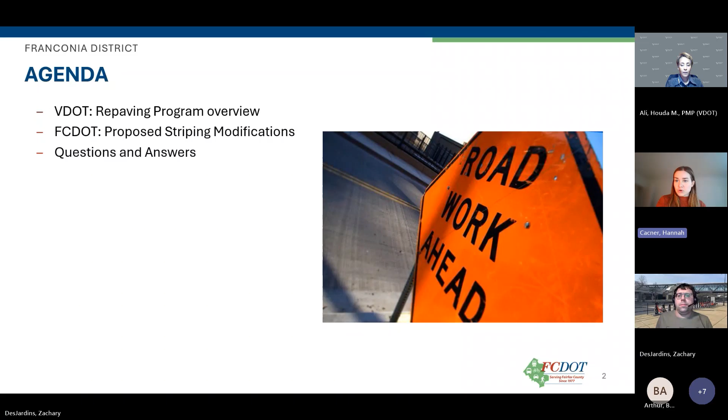Well, thank you, Hannah. Good evening, everyone. Pulling up the slides now. Do you see the slides? Yes. They're not in presenter mode. Oh, there we go. Okay, great. Thank you. Good evening, everyone.

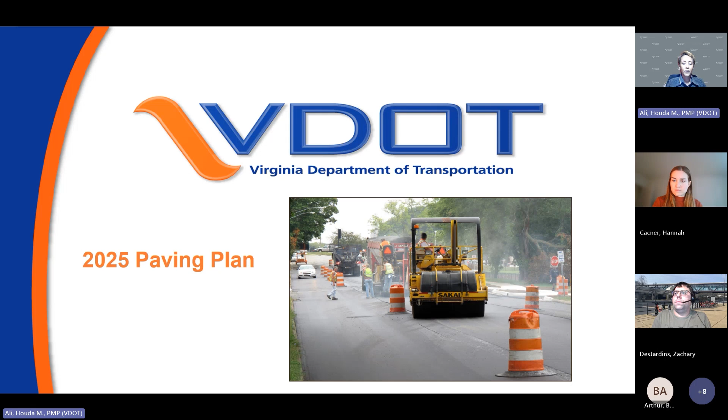I will be presenting the VDOT annual paving program tonight. On tonight's agenda, we will be covering the state lane mile inventory and the lane mile inventory for Northern Virginia District, the planning and construction phases of the repaving schedule. We'll also go over the process for how roads get selected for paving and how the pavement condition is determined using the CCI rating system. We will present information about our dashboard and the pavement condition targets, the various types of pavement treatments, this year's budget, and the different types of pavement markings and striping before we transition to the county's presentation on the topic.

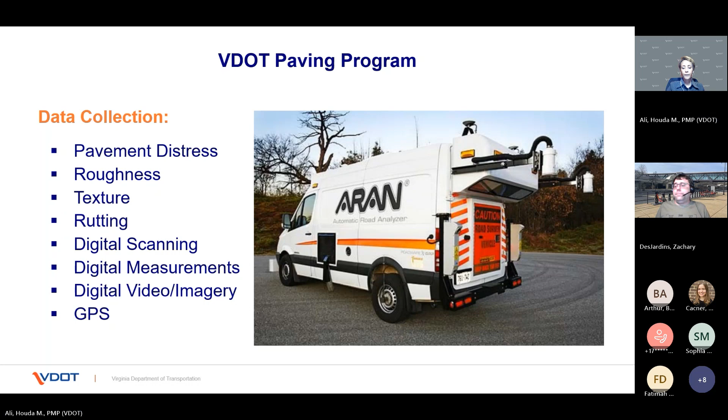The frequency of data collection depends on the type of roadway. Data is collected annually for interstate, primaries, and high-volume secondaries, those with average annual daily traffic higher than 3,500 vehicles per day. For low-volume secondary roads below 3,500 vehicles per day and with a route number of 600 or higher, those make the majority of the lane mileage, including residential streets. For those, we do 20% every year with the goal to complete the entire mileage inventory every 5 years.

Once the pavement condition data is collected and analyzed, it gets translated into a rating on a scale from 0 being worst to 100 being best, like in a new roadway. The rating system we use is called CCI, as mentioned earlier, which stands for Critical Condition Index. We focus on very poor and poor roads with sufficiency ratings below 60 CCI. We do not pave roads with ratings higher than 60 CCI.

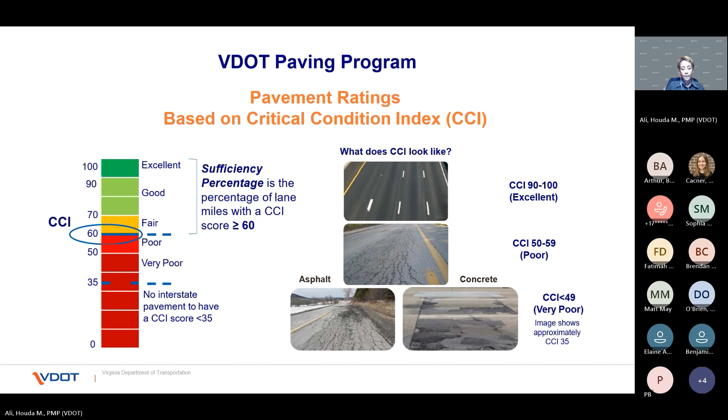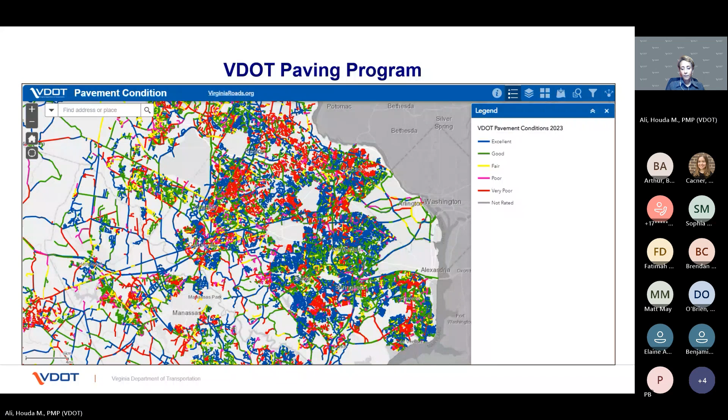In general, there are two main types of treatments: preventive maintenance treatment, where we try to extend the life of pavement by applying slurry seal. We also do limited patching and crack seal. Candidate roads are typically not in poor condition and have CCI rating of 60 or above.

In regard to the corrective maintenance, we do mill and overlay 2-inch most commonly and up to 4-inch, depending on the road condition. This treatment is most common and targets roads in poor condition. In rare occasions, we may have to replace the pavement to full depth and rebuild the road. Roads targeted with this type of treatment are typically very old and were built to old standards.

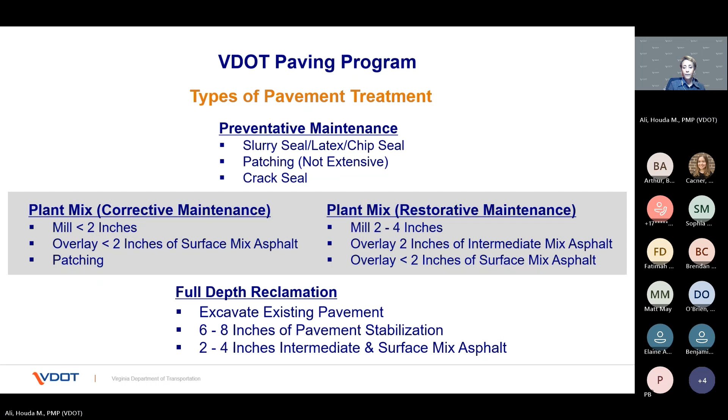Our VDOT infrastructure and maintenance teams have determined that about 43% of our low volume secondary roads have combined critical condition index in the 30s and 40s, indicating very poor condition, and are due for repaving. At current funding levels, we pave about 6% of the road network each year. Nova District continues to work diligently to catch up on paving roads across Northern Virginia, and until the roads are ultimately repaved, maintenance team will continue to monitor and treat roads for emergencies and safety-related issues such as potholes and needed patching.

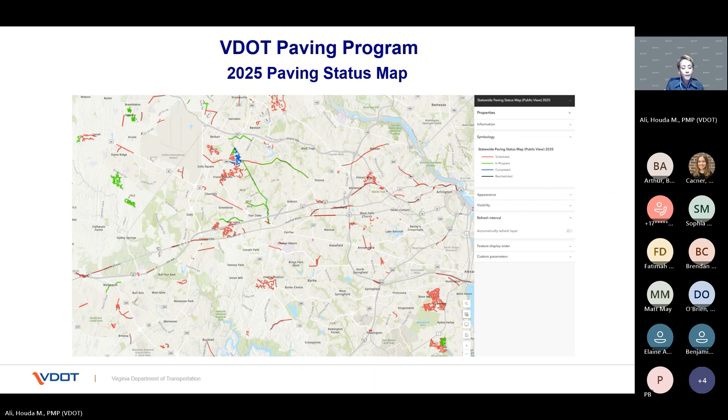VDOT restripes most commonly to replace in kind, as in put back what was existing before we mill and repave the road. We may occasionally restripe to improve a traffic condition by extending a turn lane, for example, or to enhance safety and operations. We also take the opportunity of repaving to collaborate with the county to implement new marking patterns if existing pavement width allows, to enhance on-road bike routes, and to add new crosswalks where feasible to improve pedestrian safety.

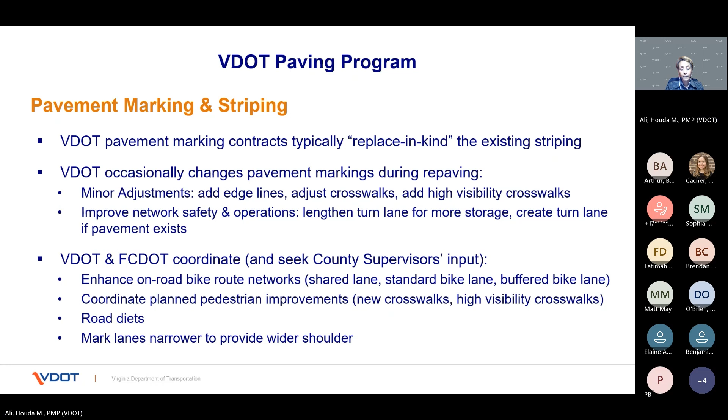This last slide contains some helpful information on how to report a road problem.

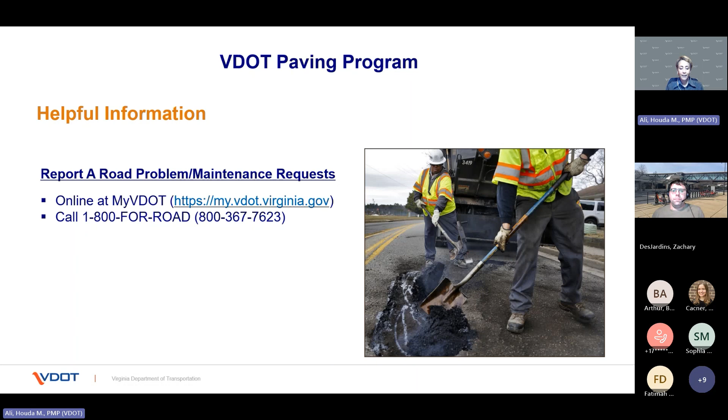Thanks, Houda. I saw that ARAN van not too long ago checking I-66, so it does exist. Oh, that's cool. I haven't seen one yet. Yeah. I was like, it looks exactly like you shared.

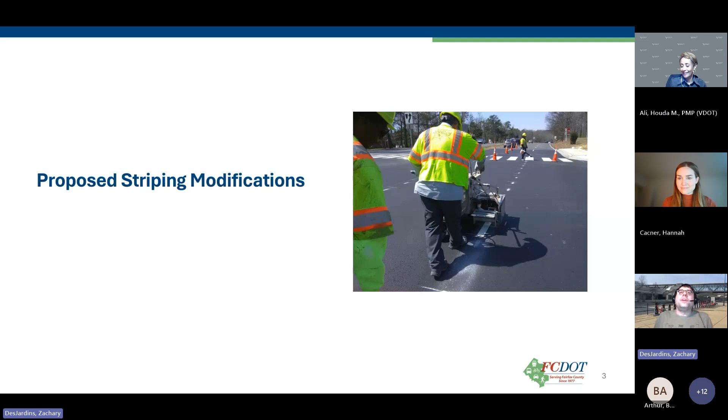So thanks, everyone. So tonight we're going to talk about some proposed striping modifications. As Houda mentioned, this part of the paving program is a collaboration between Virginia Department of Transportation and Fairfax County Department of Transportation. We collaborate to improve safety for all users. We will begin by reviewing the draft repaving plan, usually in May or April, and we'll look for opportunities for improvements, such as potential crosswalks and potential bike lanes and other things.

VDOT will then develop the actual plans to stripe what we requested, and coordinate implementation with the contractors. That very hard job of making sure the contractors pave on time and do a great job. Then we'll lead the public engagement. That's why we're here tonight, and we'll coordinate with our supervisors. VDOT also upgrades curb ramps throughout the process, and then after the paving is complete, Fairfax County will install the signage showing where we have new bike lanes and new crosswalks.

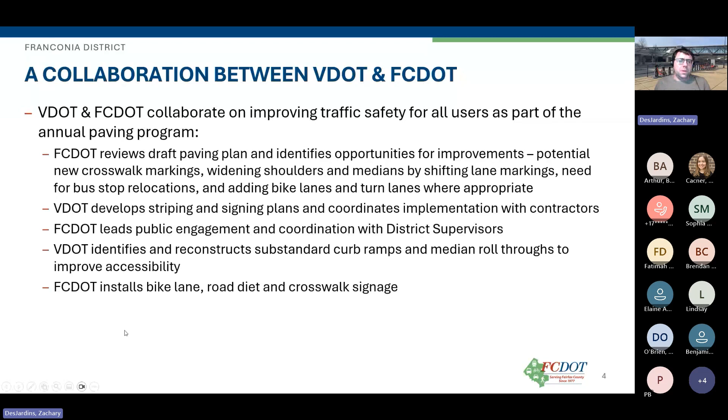So many roads in Fairfax County are built quite a bit wider than needed or have too many lanes, leading to safety issues such as speeding and inattentive driving. Repaving provides an opportunity to right-size those streets and provide new bike lanes and turn lanes that improve safety for all users at very little incremental cost compared to putting it back exactly as it used to be. We usually maintain traffic capacity at traffic signals, and as I mentioned, it aids in building out our planned bicycle network.

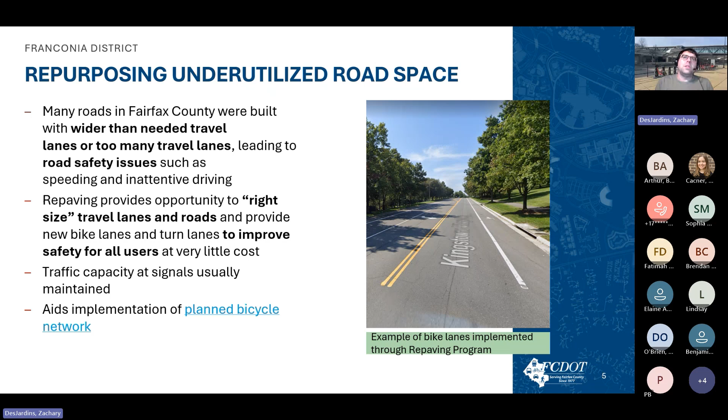So a great example here in Franconia district, if you've been over to Fleet Drive, that runs between Beulah Street and Franconia Road. It used to be quite a large road with very wide lanes. And the last time VDOT repaved the road, we worked together to implement buffered bike lanes. We added a center turn lane and right turn lanes to reduce the speeding.

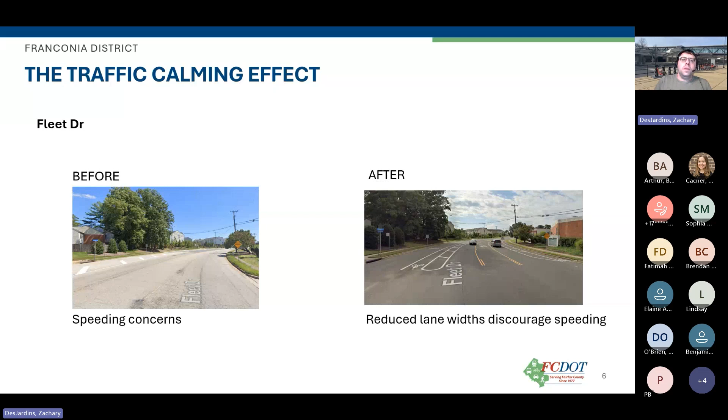So we have a couple different bicycle facilities in Fairfax County. The first one is shared lane markings. We don't usually use those very often. We primarily try to paint standard bike lanes as well as buffered bike lanes. Standard bike lanes don't have a buffer space between traffic, whereas buffered bike lanes do.

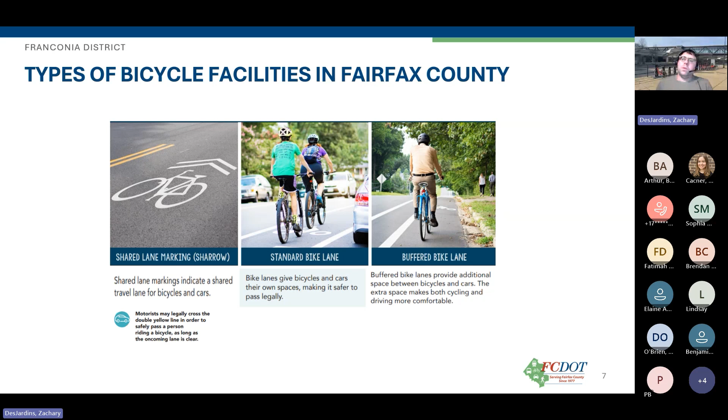There's a couple different types of bicycle riders that you see throughout the county. There's some folks who are strong and fearless, will ride on any road. And then we also have folks who are enthused and confident. So that's primarily who we're targeting. And as we build out buffered bike lanes, we're trying to attract more folks who are interested but concerned about safety.

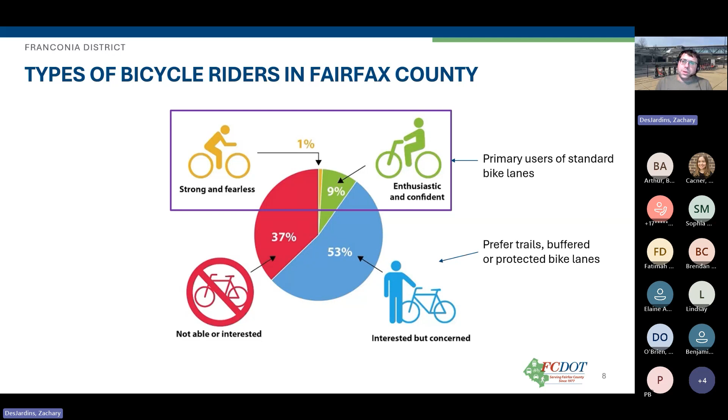So there are benefits to bicycle infrastructure beyond just benefiting people who are biking. For example, if you're trying to cross the street, having that narrow travel lane width, where the cars are, essentially reduces the crossing distance. It adds a buffer between you and traffic if you're walking on the sidewalk. So it makes it a little more comfortable and safe to walk.

It reduces noise throughout your neighborhood because we're able to reduce speeding. Faster vehicles create more noise. And that also improves visibility, especially if you're trying to exit a driveway or a side street, because we push that traffic away from the edges of the road and closer to the center where it belongs.

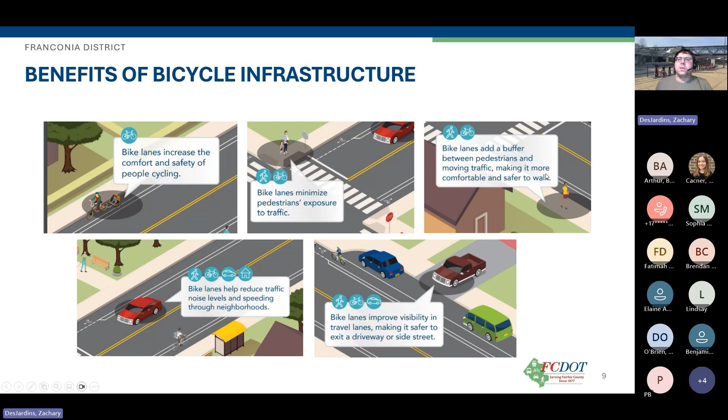So we have a couple proposed bike lanes in Franconia district. The first one here is on Bedrock Road. It runs between Green Spring Lane and Harrison Lane. If you've been out there lately, you'll notice there's an existing bike lane in the eastbound direction that we put in 2017, and we'd like to keep that in place.

And then we're also proposing to add a bike lane in the westbound direction, which is in line with our countywide master bicycle plan. To do this, it would require removing some street parking on one side of the street. So we'd remove approximately 83 spaces, and the parking bay on the eastbound side would remain with about the same number of spaces. In our survey, you'll be able to select one of two options. The first is making no changes, and the second is removing the parking lane for bike lanes in both directions, with one parking lane retained.

So in the survey, you'd be able to rank by your preference. You can just remove the uphill parking lane so that the people biking can go uphill and not have to share the road. There's of course make no changes, and then you'll have an option of removing parking in both directions to add the bike lanes.

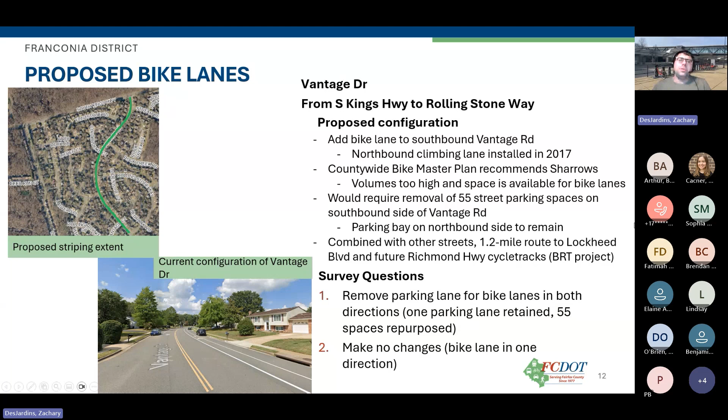Moving a little bit closer to the Franconia Springfield Metro Station, VDOT has proposed to repave Kingstowne Commons Drive from Park Village Drive to Beulah Street. We're proposing to add bike lanes on both sides of Kingstowne Commons Drive, which is in line with the countywide master plan. Because Kingstowne Commons Drive is quite a bit narrower than Bedrock and Vantage, we'd have to remove street parking on both sides to add bike lanes in both directions. Cognizant that that would be a more significant impact, we did a parking study.

You can see the results outlined here. Anywhere you see green, 0 to 11% of the spaces we found were used. The spaces in yellow were a little bit more used, running between 16 and 23%. And then we had 2 spaces in this red-orange color from 40 to 67% utilization. We also proposed a crosswalk near Hollyford Lane, which is right about here.

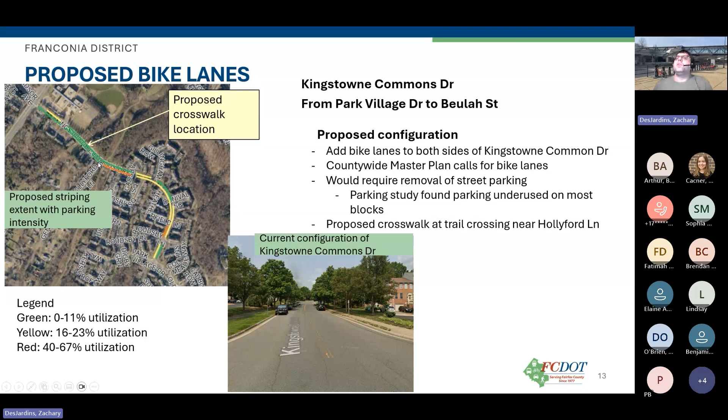So in the survey questions, you'd be able to rank your preferences. The first option is make no changes. Another option is add bike lanes along the full length, repurposing approximately 177 parking spaces. The next option is add bike lanes on most of the street, except for southbound between Donival Square and Park Village Drive, this space in red.

We observed that approximately 34 spaces were used at the highest along the whole street, and most of them were congregated here. So we would drop the bike lane right here, and cyclists would share the road going in that southbound direction. And then we also have an option where we'd retain even more parking spaces, starting here from Hollyford Lane all the way down to Park Village Drive. That'd be approximately 60 spaces retained, and the rest would be buffered bike lane or regular bike lane.

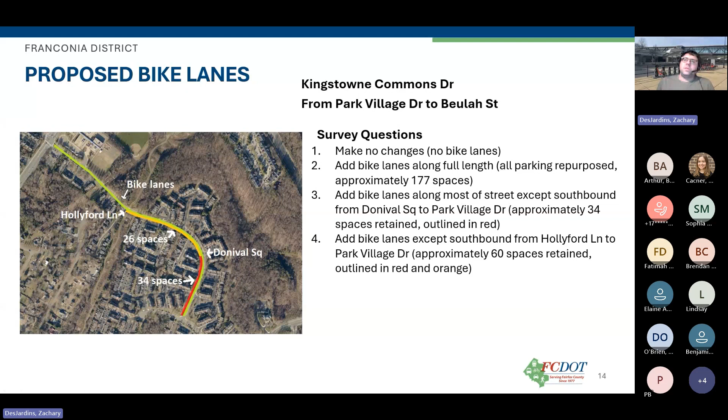In terms of crosswalk enhancements, we look for locations without crosswalk markings to determine whether it meets VDOT's warrants and criteria to mark that crosswalk and whether parking restrictions are needed, to make sure that you can see people in the crosswalk and they can see you. And then VDOT also upgrades existing crosswalks from standard to high visibility near schools and near transit stations. So if there's a crosswalk that just has two lines, that will be upgraded to high visibility. That looks like these piano keys on the right.

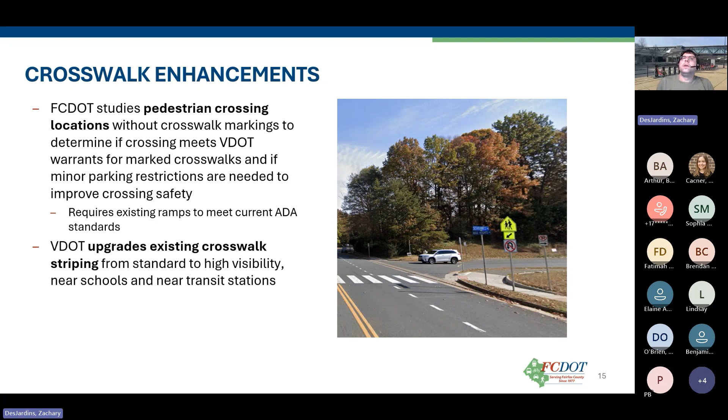So we only proposed 1 crosswalk on Kingstowne Common Drive, and it's at this trail crossing. It connects these 2 segments of about a mile-long path, and there's also a spur to Lane Elementary School. There are some parking restrictions necessary, and this one's still subject to VDOT's final approval.

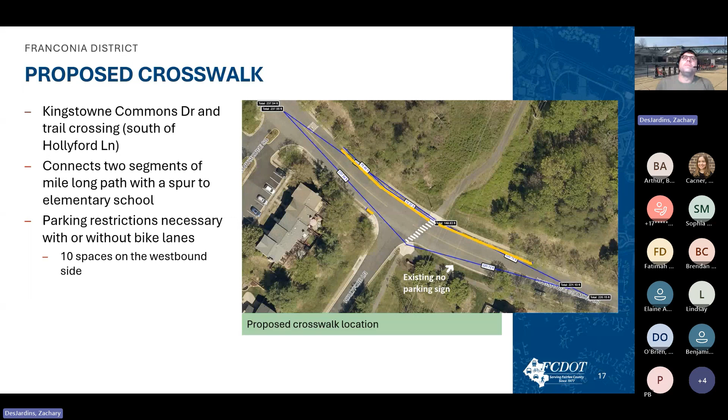Again, as Huda mentioned, if you have paving related issues, please go to the My VDOT portal, and you can request repairs to do anything from drainage, missing signage, signal repair, walkway repair, and sight distance issues. As the spring arrives here, our vegetation is growing and certainly causing issues.

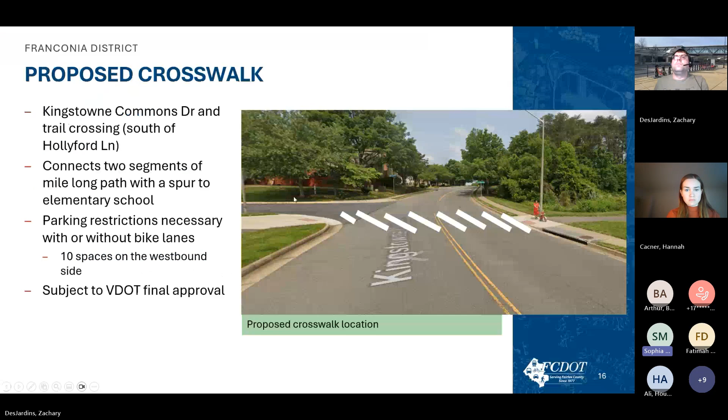Okay, thank you. I just wanted to ask a clarifying question about the section you were talking about on Bedrock Road. If you could maybe go back to that slide. It wasn't clear to me, are you going to be making any changes to the barrier that's currently between the Woodstone neighborhood and Vantage neighborhood? I thought there was a bullet point somewhere that said something about connecting Vantage and Lockheed, and I thought the only way that you could do that is by removing that barrier, which we spent a lot of time and effort to put there because people used to shortcut through the neighborhood between two main roads.

Thank you very much, Sophia, for that question. That's a really good question. No, the barrier is not going away. It will remain in place. The reason I said it would connect those streets, it would connect if you're riding a bicycle. So you can go around the barrier on the sidewalk via your bicycle. Of course, we won't want vehicles doing that. So that part, it'll essentially pave right to the barrier and will stop. Thank you for your question. Okay, thanks for clarifying.

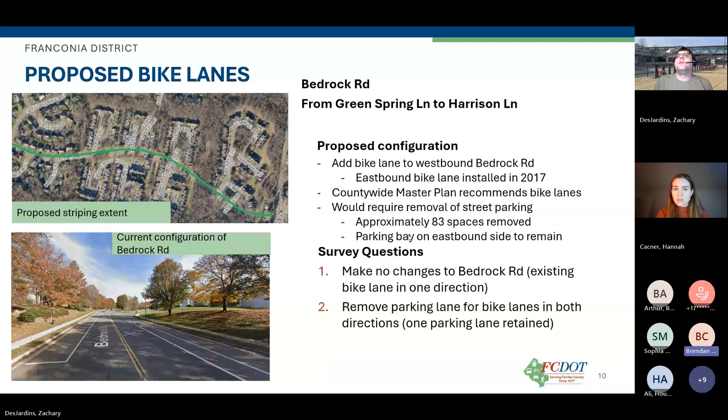Okay. And the name of the program that Zach is referring to is called the RTAP program, RTAP. If you just look up FCDOT RTAP program, you should very easily be able to find all of the information on that program. I think I found it. Thank you. Okay, great.

All right, thank you, Brendan. We will go ahead and move on to Steve. All right Steve, you should have microphone access now. Yes, we can hear you. Oh, I can't hear you anymore. Sorry, can you hear me? Yes. Okay, thank you.

So I'm, I guess, most concerned with Kingstowne Commons. I'm an employee of the Kingstowne Association. The first question I had, the parking study that you conducted, do you know what day of the week and approximately what time that was conducted? Yes, we can actually share that. We'll post the study to the webpage. It was conducted multiple times during the day. So we wanted to get morning, afternoon, evening, so that we could get an accurate picture of what was happening.

Yeah. Overnight, I would think, was the most used, though. Yeah, overnight was the most used, and that's where I got that 34 spaces being used. And then I think it's just worth noting, this road already has a sidewalk on one side and an asphalt multi-use path on the other. So to me personally, it seems a bit extreme to remove the majority of the parking for the bike lanes, but you know, I'll look at what the county's considering.

So basically the schedule will have the SS9A25. SS typically refers to slurry seal. If it's PM, then it's a plant mix, which means hot asphalt. Okay. Got it, I see that. Okay, all right, that's good information. Thank you. Of course.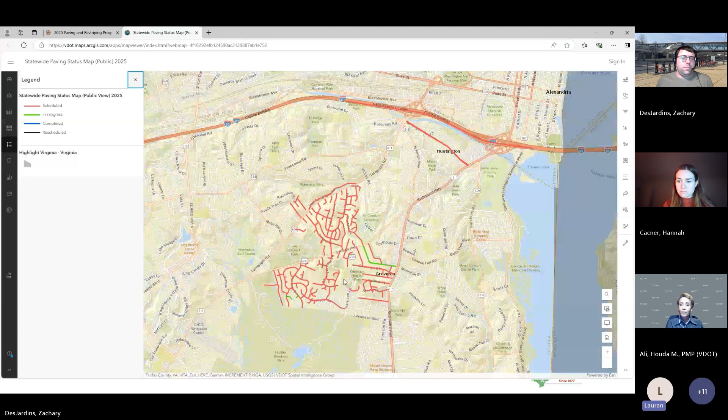I was interested in the traffic calming as well as Brendan. But I am glad to see that the plan is to do the parking, if it's done, on the eastbound side of Bedrock, because there is some visibility issue along Bedrock, particularly closest to Harrison. There's a good number of people that park on Bedrock, and they block visibility for Fairfield, Westfield, and some of those adjacent streets that are nearest to Harrison.

And they aren't really monitored well by Fairfax County Police when they park over the lines. So that'd be great if that's just parking on that eastbound side. Yeah, thank you for your feedback and your questions, Lauren.